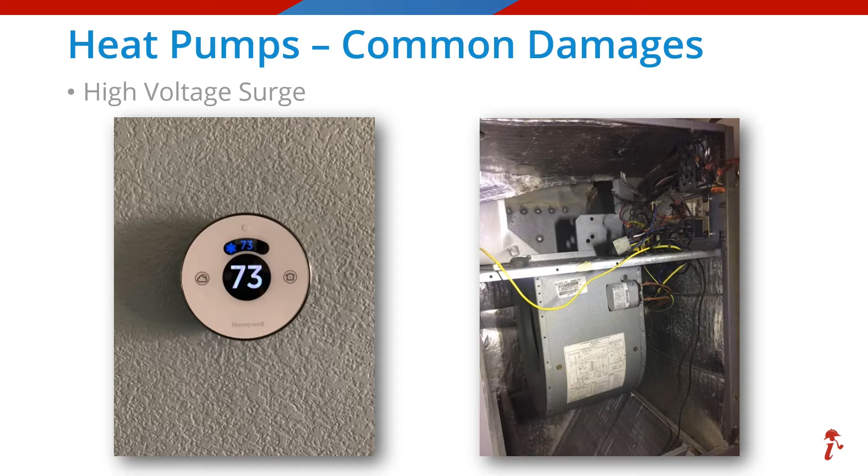We will start with a quick review of high voltage surge, which can affect any electrical components either in the condenser or the air handler. On the inside, these could include the thermostat, any wiring, the transformer, furnace control board, or that blower motor. In the outside unit, those surges could affect the capacitor, the contactor, more wiring, and the defrost control board, as well as the fan motor.

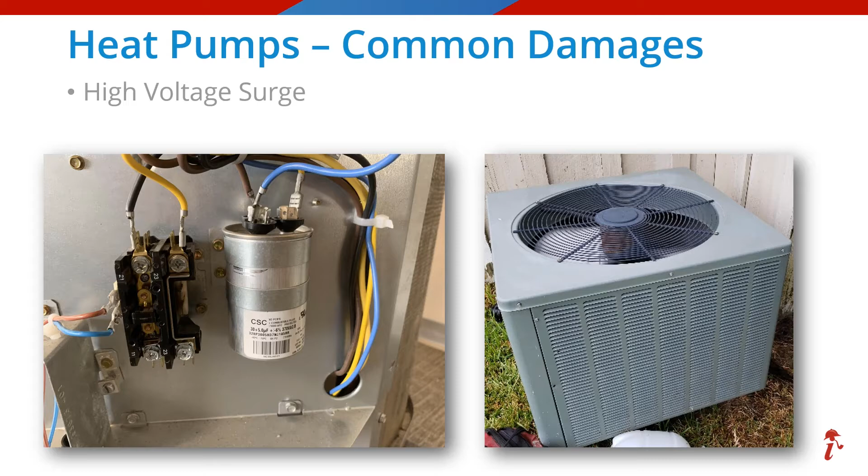But we can't forget about the compressor, which is the costliest component that may be affected. When surge does affect the compressor motor, it usually is not visible, and only a licensed technician with the proper testing tools can make those determinations of damages.

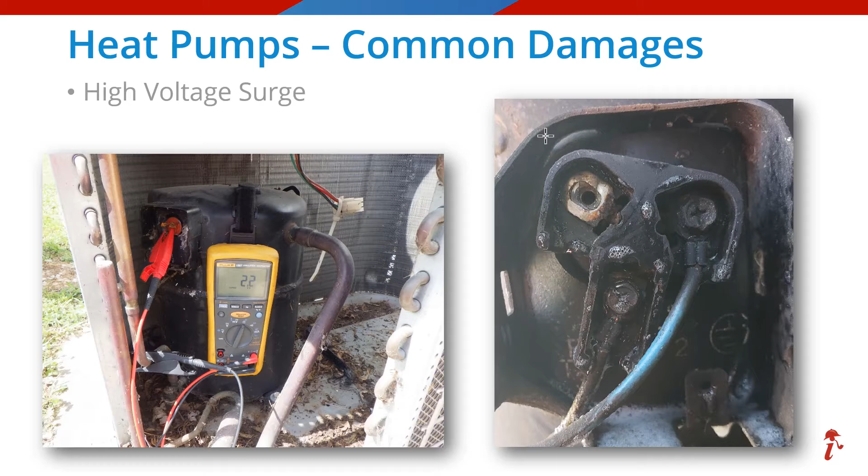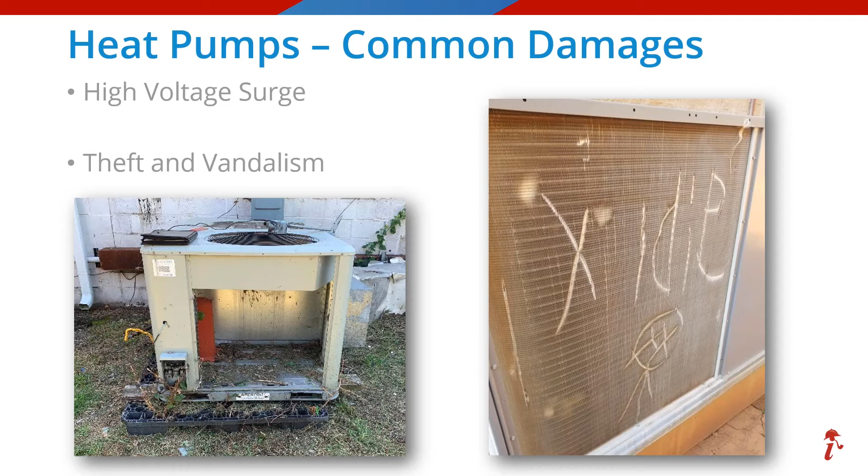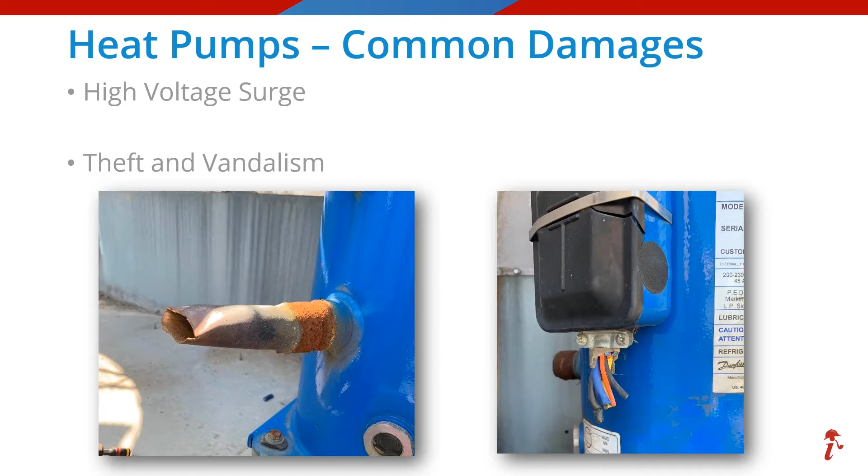Next, we're going to review theft and vandalism, and these first two photos tell those stories perfectly, from stealing the coils for copper to writing a name in the coils, probably just for fun. This photo shows more signs of theft and just how desperate those thieves can be when they are cutting the copper pipes all the way back to the compressor and even cutting and taking all the copper wires.

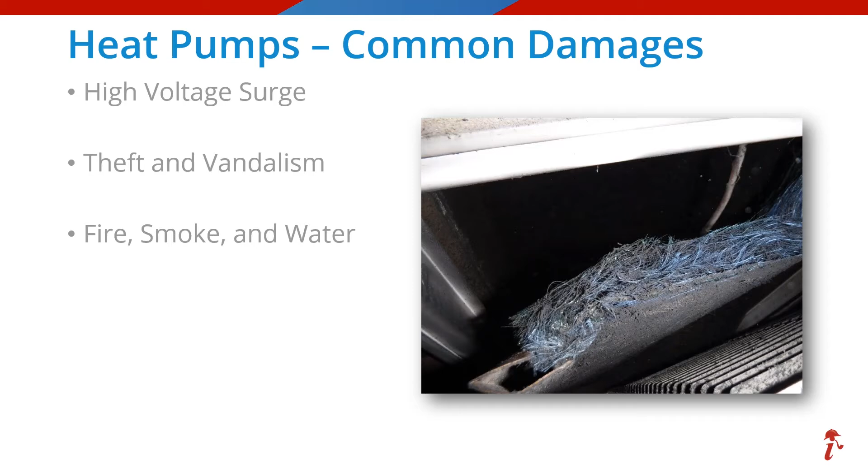And of course, these units are not immune from fire, smoke, and water damages, all of which are usually to the inside air handler. These would pretty much be the same as reviewed for furnaces. Be sure to consider the type and amount of smoke and whether cleaning the unit and replacing the filter might be the proper repair method. In some extreme cases, a full replacement may be required.

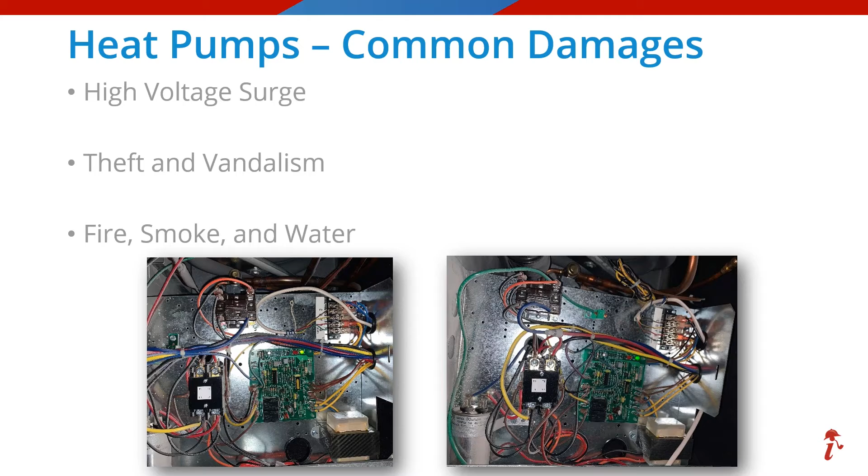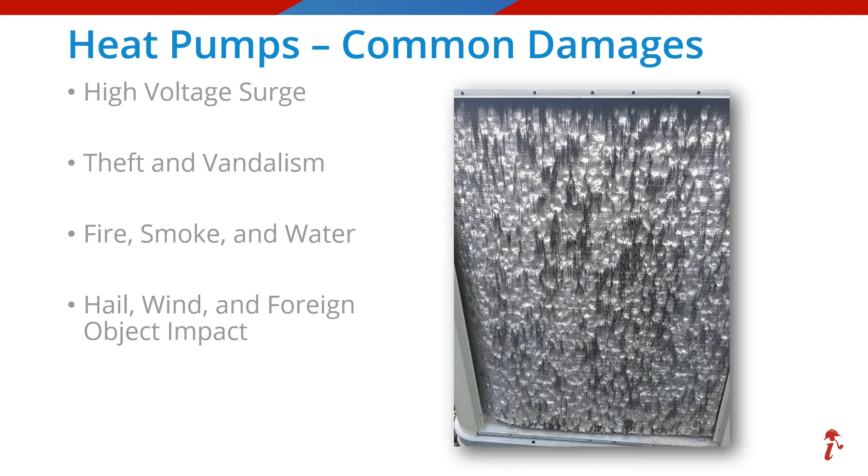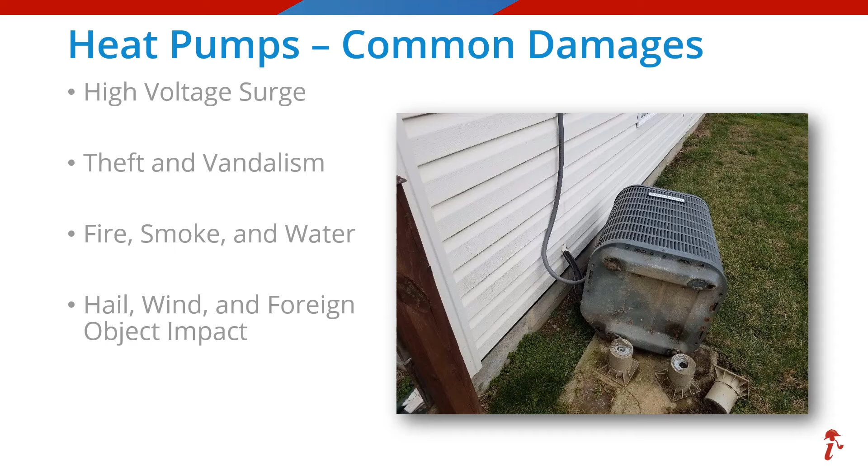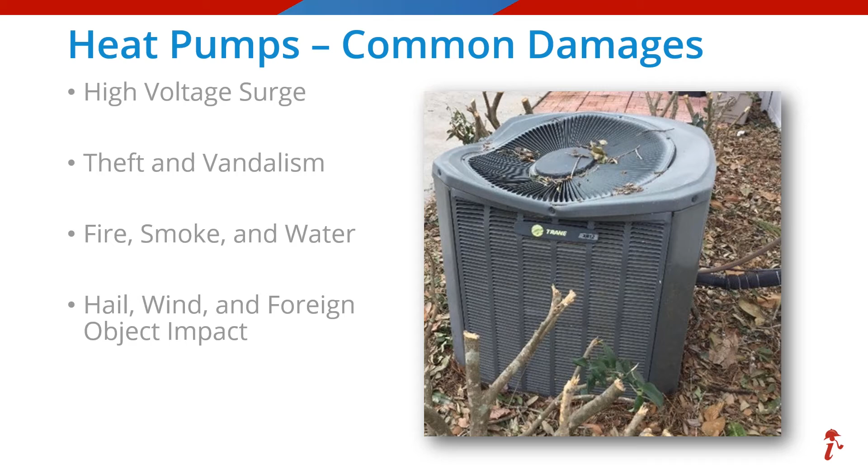Wind can also cause damages such as tipping the condenser units over as seen here. This could damage the unit and kink or break both the line set and/or the electrical whip. And windstorms could also cause falling trees or large branches that hit the unit and cause damages. This unit will have to be replaced due to the level of damage, but that does not mean that all the inside equipment needs to be replaced as well. That will depend on the type of refrigerant the system is using and the configuration of the inside equipment, as well as probably efficiency.

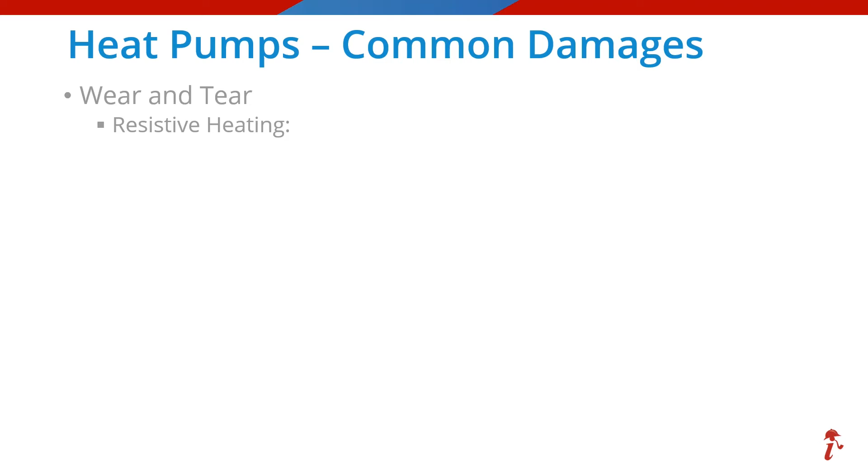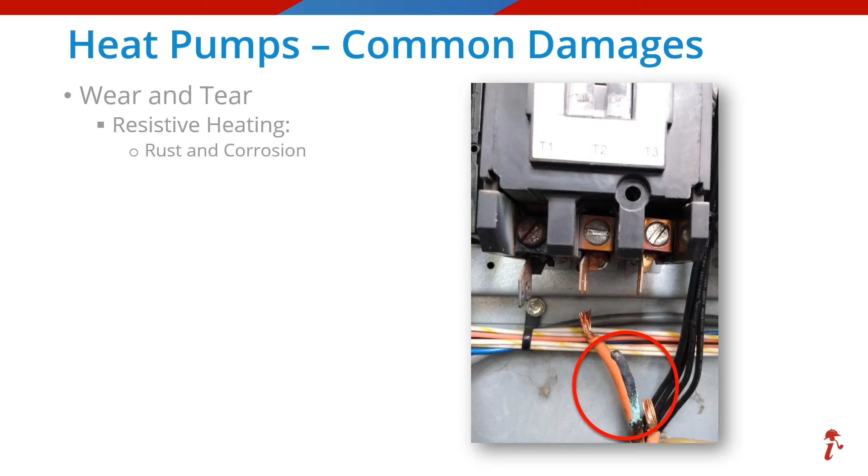Wear and tear is a large part of what we see with heat pumps, so we'll review the top 3 wear and tear items that kill these systems. Our first one is resistive heating, which is damage at or near connections that for some reason have built up high resistance and causes the wires to overheat, which can char or even melt the wires and wire insulation. So what causes this buildup of resistance? One cause is rust and corrosion. Notice that rusty screw connection on that heat pump contactor and the resulting damage as the wire continued to overheat over time until it finally failed with charring, melting, and corrosion of the connected wire.

The other common cause of resistive heating is poor or loose connections. See the damages on those capacitor wires near those slip-on connectors? That is not lightning or surge damage and did not happen suddenly or accidentally. This type of damage happens over time with hundreds of on-off cycles of the unit. Also remember, resistive heating, especially from rusty or loose connections, is almost always within 1 to 2 inches of the connection.

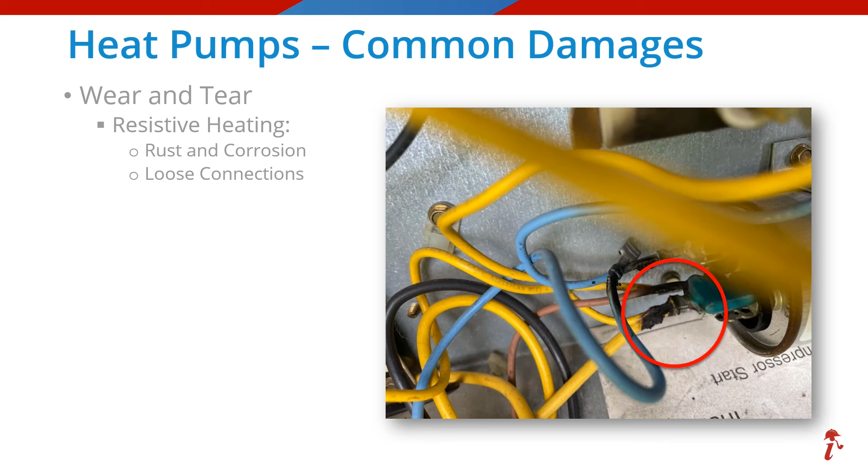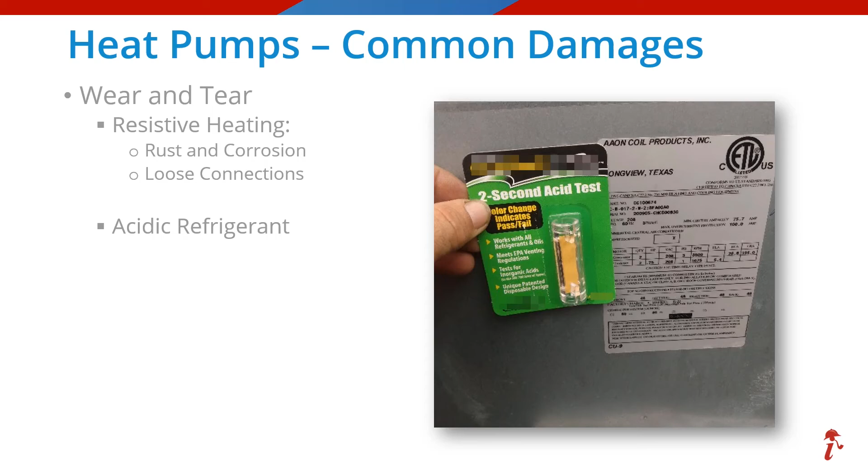Please note, refrigerants and oils only become acidic over an extended period of time due to moisture, mixed refrigerants, or other contaminants, many times from refrigerant leaks. A lightning strike or surge event occurs instantaneously and cannot acidify the refrigerant or oil in such a short period of time.

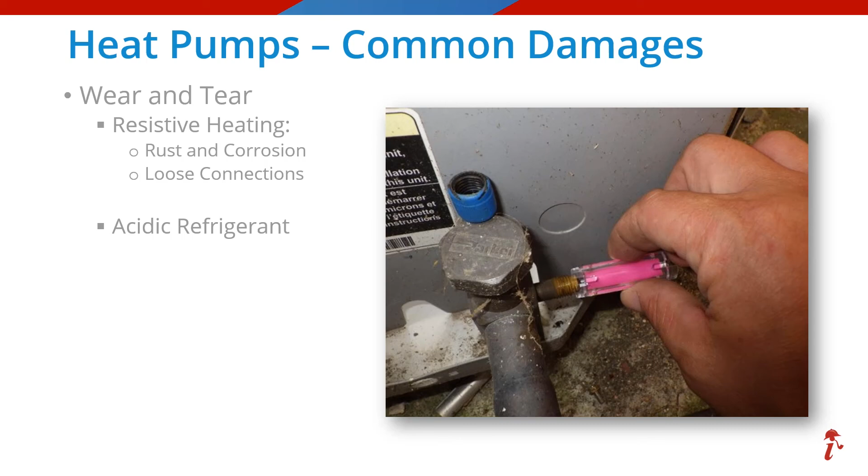Dirty coils are the third and final wear and tear item that is a slow killer of AC systems, especially the compressor. Dirty coils could be either outdoors, indoors, or both. This is strictly a maintenance issue. Outside coils need to be cleaned regularly by spraying them off with a hose, but be sure it's not a pressure washer as that could cause damage. Inside coils are kept clean by the filter, and those filters need to be changed regularly to maintain a clean evaporator coil.

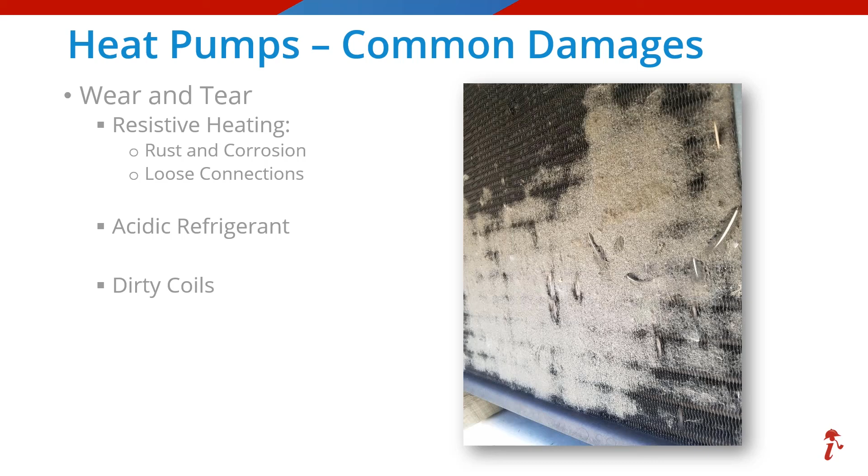If we have dirty coils, the system won't cool properly. The dirt, dust, and debris acts as an insulating blanket that impedes the heat transfer and the phase change of the refrigerant and adds undue stress on the equipment, causing the motor, windings, and wires to overheat. It also reduces airflow through the coils, which compounds the issue. Next, we're going to look at a couple heat pump claim scenarios.